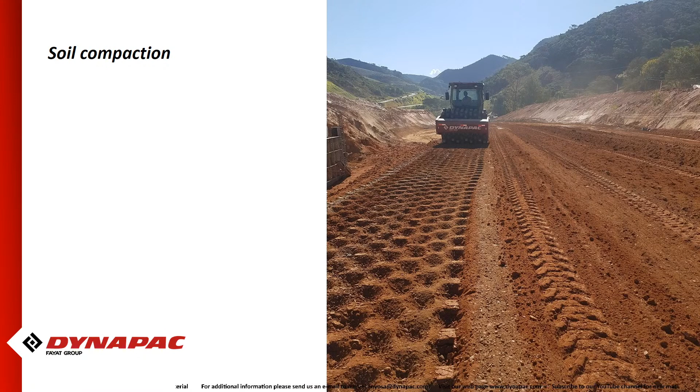But where does compaction begin? We begin with soil compaction. So we're going to start with this one first.

When we're talking about road construction, what does soil compaction mean? Usually we begin with moving the earth, moving the material we are going to compact. Then we level up the material a bit, and then we compact with the machine. So here is where we come in, we are the ones responsible to do this. But what do we use?

Depending on the material we are going to work with, we are going to use a smooth roller, a smooth cylinder roller, or a cylinder with pad shells, or maybe we are going to use a CT3000, which is a tamping roller. So depending on the material we're going to work with, we have to select the correct machine for the project.

So which machine should we start with? First we have to define what is compaction. So what is compaction itself? We have the material, the loosened material, and this is composed or made of soil particles, water, and air.

So what we are going to do is use mechanical forces to pull out the air and increase the density of the material. So here you have the loosened material, we have material in its normal, natural form, and through vibration we are going to accommodate the particles. You can see they moved and they are one above each other, and also through the impact or the force we are going to pull out the air and increase the density of the material.

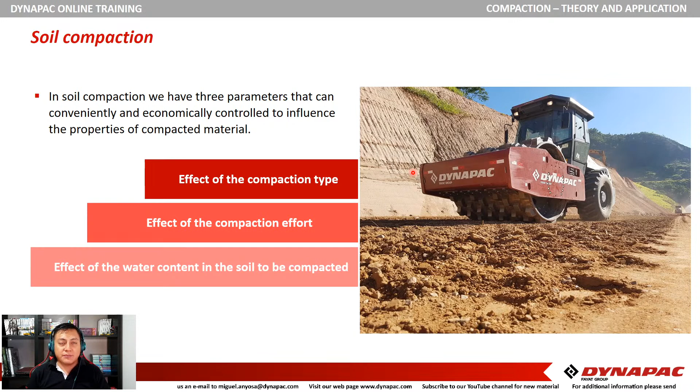So once again, what we were talking about is like we have the material made of soil particles, water, and air, and we are going to increase the density. But what does it mean? You have the dry weight of the material, or the dry unit weight, compared to the maximum water content. So what happens here is you have the dry material, you start adding water, and the more you add water, the more density you can reach. So you continue adding water and you continue increasing the density of the material.

So here you have to take care of this control. How do you do this? You do this through the Proctor method. The Proctor method was created around the 1930s, if not mistaken, in 1933. This engineer, Proctor, developed a method to check how much water you include in the material before reaching the maximum density of the material.

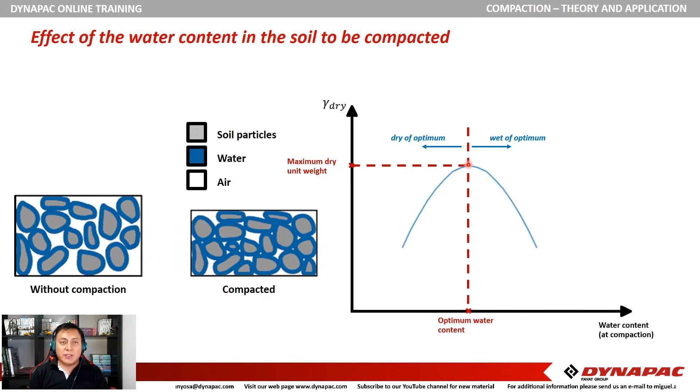So when you reach this point, before reaching this point, you are dry of the optimum moisture level, or wet of the optimum, because if you have too much water, then again you will lose the stability of the material, so you will lose density here. So you have the highest point, you have to calculate it, and this is where you are going to work, and this will be your comparison or your point of measurement when you are talking about compaction.

So what I was talking about here is like when you have the Proctor, you are talking about the energy you are going to use to compact this material. So the standard Proctor developed in earlier years, you have this weight dropped from a height of almost 30 centimeters, and you have material and you will impact this weight on the material.

So this creates some energy, this dynamic energy you are using to compact the material, and this will create a curve that you can see. So you are increasing the quantity of water and you can measure how the density is increasing. Then in the Second World War, we had bigger machines, bigger airplanes, bigger trucks, more load, so he needed to develop a test that could handle this new quantity of load, or the force the material would have to support.

And he created a modified Proctor, and he increased the energy and the quantity of layers. This way you can measure what we are talking about, the modified Proctor, with more energy. Actually, you can see here that from the standard to the modified, you have more energy needed, but with less quantity of water.

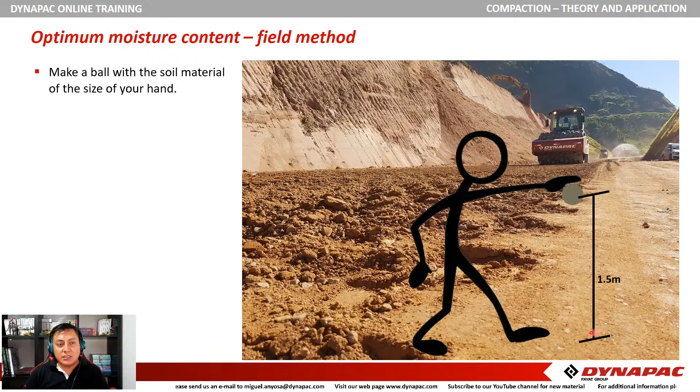What you can do is make a ball of material in your hand, like a snowball, with the material you're going to compact. You drop it from a height of 1.5 meters onto an already compacted place. This part is already compacted, so when you drop it, it will hit the floor, and depending on the behavior of the material, you are going to see if it has good water content or is still a bit dry.

For example, if it breaks into several parts and is spread around like several particles, then you know the water content is less than optimum. If it breaks into 2-3 parts that remain fixed, maintaining some stability, then it's quite close to the optimum moisture content. And if it deforms completely without breaking, like mud that hits and just deforms, then you know it has too much water. So this is a quick way to know in the field if the material is good or not.

Even a few days ago I was talking with a customer who had attended similar trainings here in Latin America, where we did some workshops. He called me because he had issues with compaction, and I requested this kind of video from him, and we could see it was too much water. So this can help you even if you're not there right now, given the global conditions we're aware of - you can see it from a video and be aware of what's going on with the material.

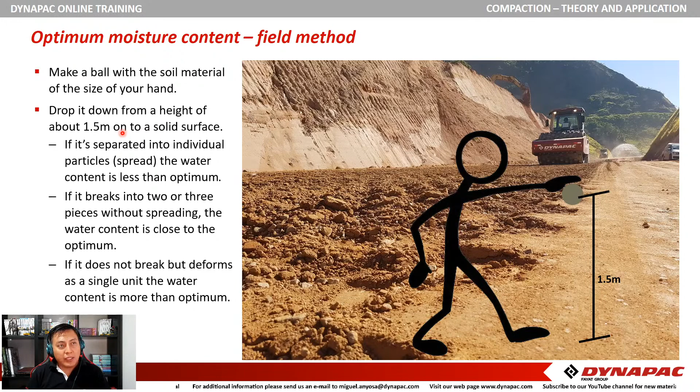So we've already seen that we can measure or handle the quantity of water. Then we talk about the energy we use to compact the material, and now we're going to talk about the machine we choose. We have vibratory compaction and tamping compaction. Depending on the machine or material you work with, you select the machine, so you can choose between vibratory compaction or tamping compaction.

I did not include static compaction here, but I will mention a few comments later about that. So, general rules for application: for coarse soil we use a smooth cylinder, and when we're talking about cohesive soil, we use tamping compaction. We can also have a cylinder with pad shells to do the compaction.

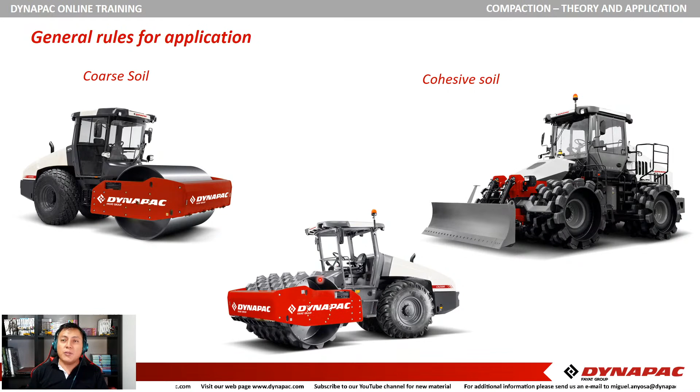But when do we use any of these machines? When we're talking about clay compaction, due to the material, we need a lot of force and a lot of energy, so you use big machines to compact this kind of material. For clay, we can talk about the CA 5500 PD or CA 6500 PD, but actually you can have a better machine like the CT3000 for this kind of material. For this kind I would recommend the CT3000 because of the high impact force.

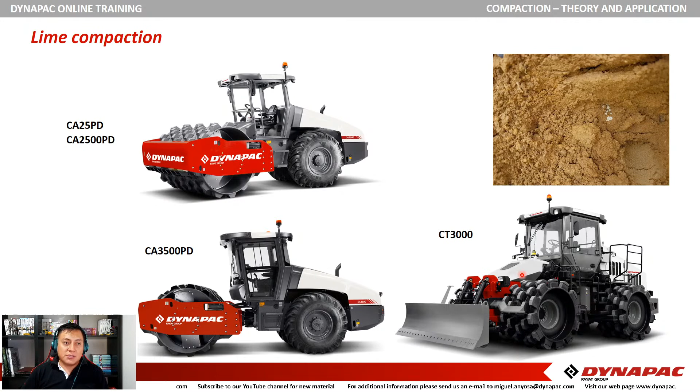Then we have lime compaction, which is a bigger grain, actually bigger size of particle. We can use smaller CA machines, not the big ones. Still, we can use the CT3000. This is actually a good machine also to compact lime.

Then we can have gravel and sand, or multi-graded gravel, and sand compaction. You have particles here, of course, and the bigger the particle you have, the bigger the machine. So for gravel, you can do it with a CA1500, a CA15, or CA25, but even a CA2500.

But the bigger the particles, you should go for a CA2800, CA3500. So you have to understand that it's not only because of the size of the machine or the weight you are going to compact with, because also the thickness of the cylinder is going to be the one that receives all the impact of the material.

So you have to also check this, because the bigger you go, the bigger cylinder you will need. For example, if you're talking about boulder compaction, here you're talking about 15 centimeter particles. Okay, these are rocks, these are not particles anymore. We're talking about rocks here.

So if you want to compact there, you will need a bigger machine and a smooth cylinder also. Please do not, we had this experience with one customer that was using a pad shell in the cylinder to try to break the rocks. Actually it could work, but you're going to have a lot of wear, and the bouncing effect on the machine is going to be such force that you're going to break very easily the shock absorbers, and you're going to damage the cylinder.

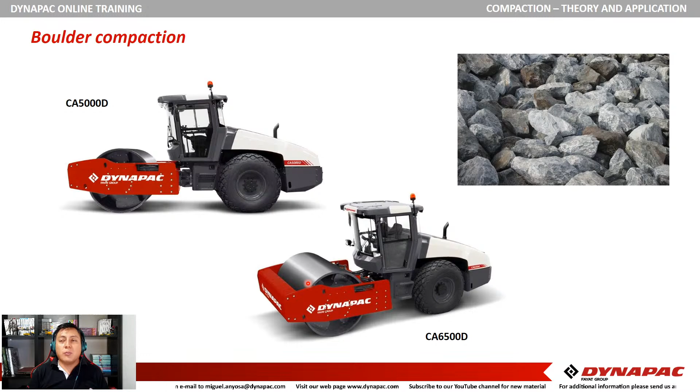You have to be aware what kind of material you are compacting. Otherwise, you are going to damage the machine, and you're going to increase your time of operation and also affect your productivity. So we have to be aware where we are using the machine and why we are using this kind of machine.

What parameters should we consider for vibration compaction? Here we're going to go into more operation tips. So, is a 15-ton machine better than a 12-ton?

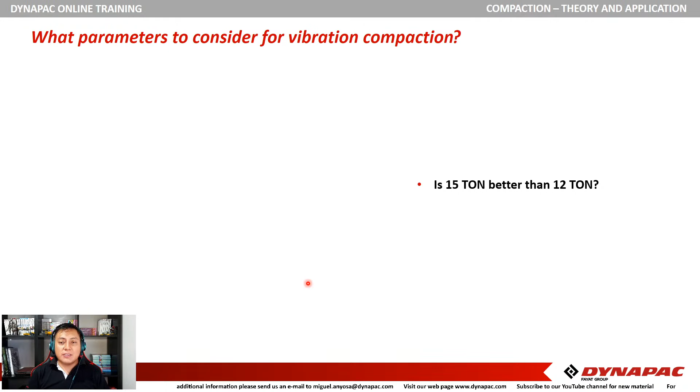One of the questions we usually receive from customers when they want to select the machine is like, I have this option, this one has more weight than yours, and they feel or think that this machine can be better because it has more weight. But you have to understand which part is responsible for the job.

So when you think about a smooth cylinder, or even just an auto-propelled cylinder here with the machine, you have to think that the engine has the pumps, and the pump is sending flow to the vibration motor to move the eccentrics.

So the one that's actually making the compaction job is the front module. The front module is the responsible one. It doesn't matter how much weight you have in the whole machine, what's important is how much weight you have in front here.

So actually here you have to think, if it's 15 ton, we have a 12 ton machine, but in the 15 you have, I don't know, 12 ton here, 3 ton here. And in our 12 ton machine, if I'm not mistaken, we have almost 6 ton here and a bit less than 6 ton here.

So actually this front module is doing the job. So more weight here means more strength here. Also you have to take into consideration the amplitude and the vibration frequency you are going to hit with. So this is what's making the work.

So if you have the values here, then you can compare. It doesn't matter if you have a 15 or 12 ton machine, you cannot compare them by the operational mass. You have to compare them by the front module mass.

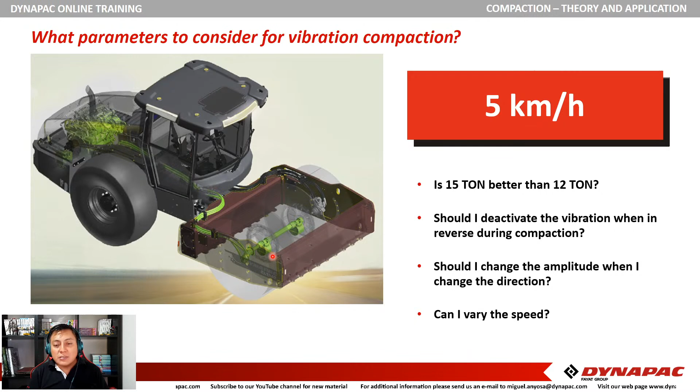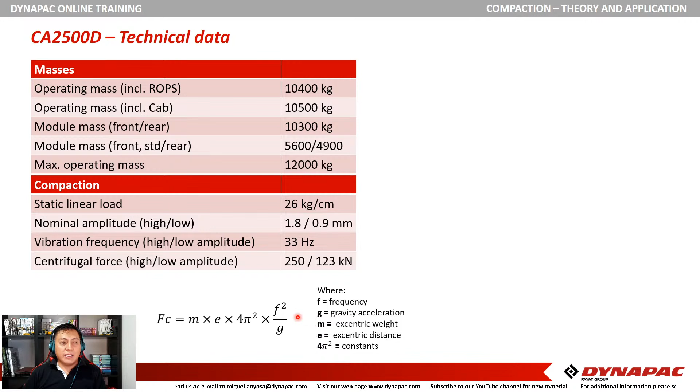Some technical information we can find in the web page. As I was saying before, it's the weight of the machine. You have the operational mass, the operating mass, and also the compaction data. One value here is the centrifugal force, which you can calculate with the formula here. Fortunately, our engineering department already works on this and can provide the value directly, but some people like to compare this value. You can find it in the web page, dynapac.com.

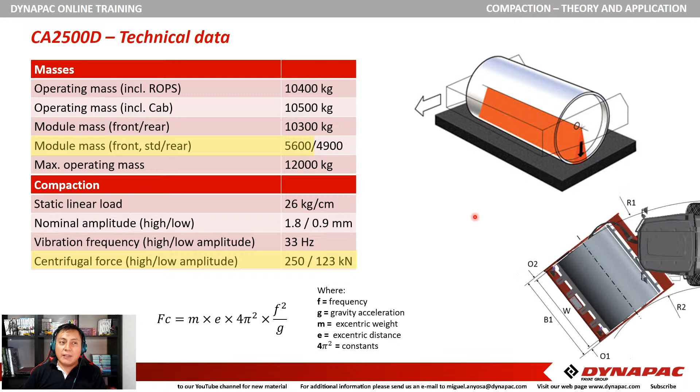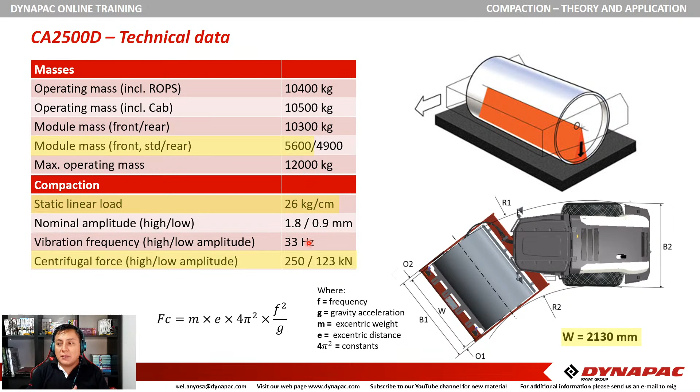And of course, as I mentioned before, the one responsible is the front module. So you need to know how much the front module weighs, and understand that the width of the cylinder has a value. If you divide the weight by the width of the cylinder, you can find the static linear load. This is also important. Of course, you can also find the nominal amplitude in the machine, and the vibration frequency, which is the times per second the cylinder hits the material.

Also you can find this information. If you don't have access to this, you can ask us at Dynapac, or your distributor or dealer, and they can share this information with you. But we have to understand this information a bit. This is some theoretical information we share, for example the maximum recommended layer thickness of the material we can compact. So with a CA 2500D, we can compact these different materials up to this amount of thickness layer.

But this is theoretical. When you start using the machine, it will start wearing. Over time you will lose thickness of the cylinder, and that way the amplitude or the impact force will change. Also, if you are not looking into the maintenance of the machine, you will have some leakage, and you will lose pressure, affecting the compaction. So even though we can say this can be done by our machine, we have to consider that this can be affected by maintenance, wearing of the machine, and of course the experience of the operator.

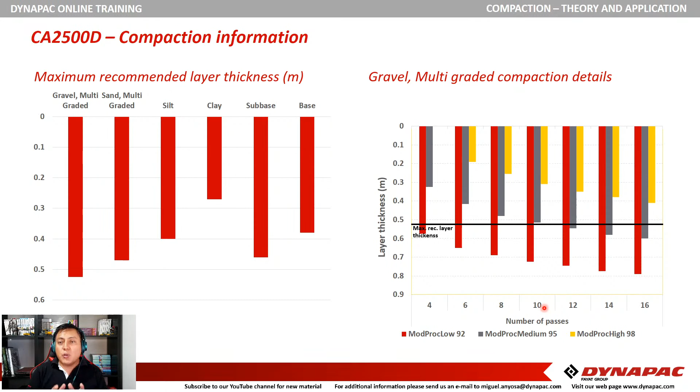But this is a nice start, because now you're aware of the average number of passes you might need. Then again, you will need to do some additional tests, so you are sure of how many passes you need to compact the material.

So what is the best compaction speed? What we have seen in the field, it's around 18 to 20 kilometers per hour. Miguel, but we have competitors that say they can achieve 30 kilometers per hour. Of course, our machine can also go up to higher speed, but we have to understand something: the higher speed you go, the higher energy you create, and the higher force you compact the material with.

So what you can see is the higher force you find will create a more bouncing effect. The bouncing effect will impact the machine and create vibration. So the higher speed you go, the higher vibration you will feel in the machine and in the cabin. So the operator is quite aware of how much energy they can feel.

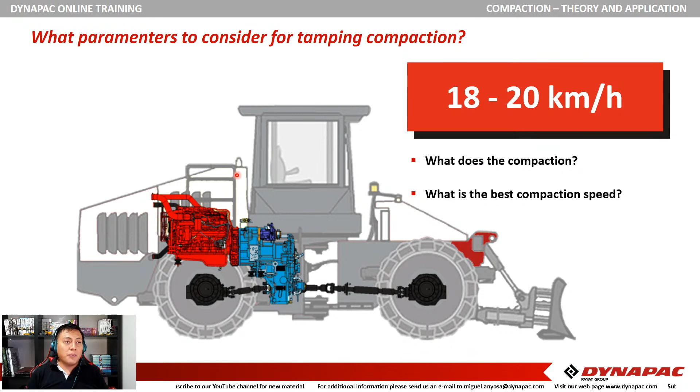So this is a good speed, an average speed you can find with the machine, but you have to be aware of other conditions of operation, the quantity of material you're going to compact, and again the thickness of the layer you're going to compact. According to the machine, if you're talking about silt, you can go up to 42 centimeters, and for clay, up to 30 centimeters.

One detail we missed before when talking about compaction: usually you have one machine that moves the material and another that levels it, so you get a similar thickness layer across the whole surface you're going to compact. But you may find some parts where you're not sure if it's 30 centimeters on average, or 20, or 50 - you can't measure that. Some parts may have 60 centimeters, others 40 or 30 or 25 or 20, depending on the material and what is below.

This part is very interesting, because if you miss it, you can have some places more compacted than others, and this can affect the readings you get from whatever tool you're using to read the compaction.

When we're talking about the CT3000 and, for example, clay - what I discussed with Marcos - the experience we had was 25 centimeters. You might say, Miguel, but to reach high compaction we're talking about 22 passes, that's too much. But remember, you're talking about higher speed here - about 20 kilometers per hour - so you can go faster, and the machine has more width, so you can compact more area. That's why we usually recommend this kind of machine for clay, so you can do it faster, not only in speed but in time.

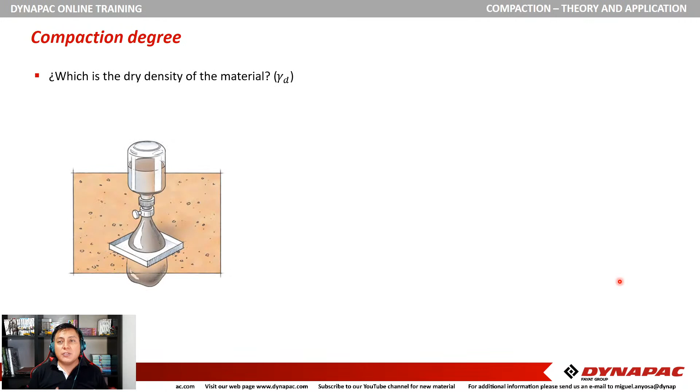In the Proctor test you do the same thing: you add the quantity of water to the material to reach the highest density possible, giving you a mixture of water quantity plus material quantity. You dry the material, so you know how much material you have, then you weigh it and compare this weight. So first you take the sample, take it to the oven as I mentioned, and let it rest.

There are also field tests that use centrifugal force to separate the water quantity, then they calculate: if I weigh the material and know this much is water, the rest is material, and they compare the values. So you take the sample, find the dry weight, compare it to the lab test's maximum dry density from the Proctor test, and divide one by the other. You divide your field dry material value by the lab dry value, and multiplying by 100 gives you the compaction degree or compaction level achieved.

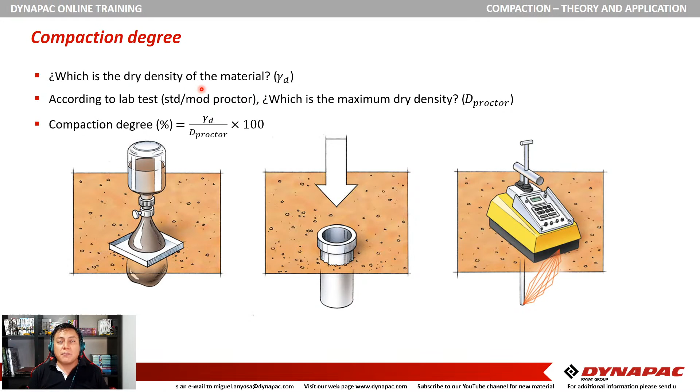Now, this is how it's done in the field, how they compare it. But this is just the most common way I can speak about, because it's what we usually see here in Latin American countries. Of course, you can also use technology, and when you have technology, you should use it.

What is the recommended number of passes?

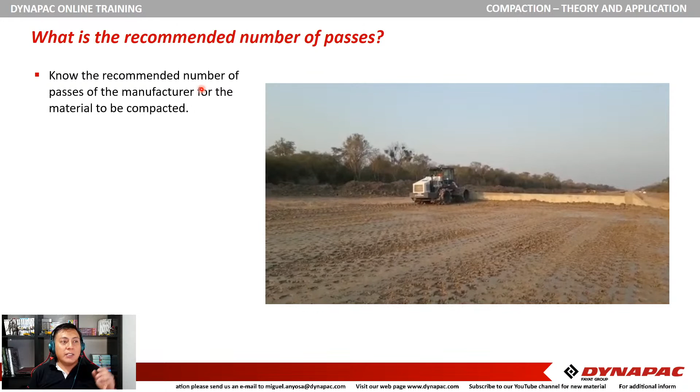When we're talking about recommended number of passes, first you have to know two values: what is the compaction degree the customer is looking for, and what is the recommended number of passes by the manufacturer. We as Dynapac can recommend a number of passes to reach a certain level of compaction, and we also have the compaction degree the customer is looking for. So what we have to understand is how many passes do we need to get to that.

So we have the thickness layer of material. We know about 10 passes to reach that material. So what we actually recommend is, if we need 10, let's start measuring from pass number 8. From the eighth pass we start measuring, then we do the ninth pass, and then we say, yeah, we are very close, or we have reached a compaction degree, or no, we need a bit more. Then we do the 10th pass, and there we are. Or maybe not, we need one more pass.

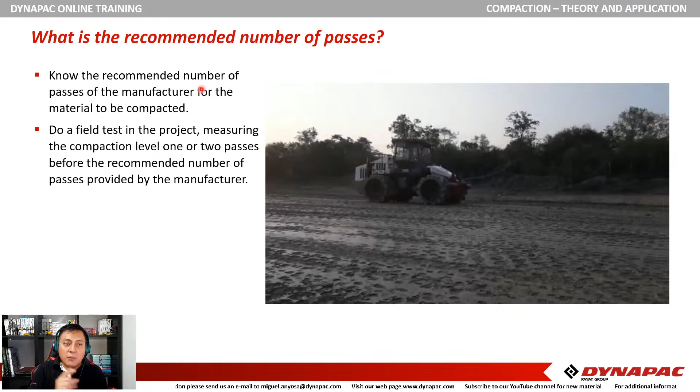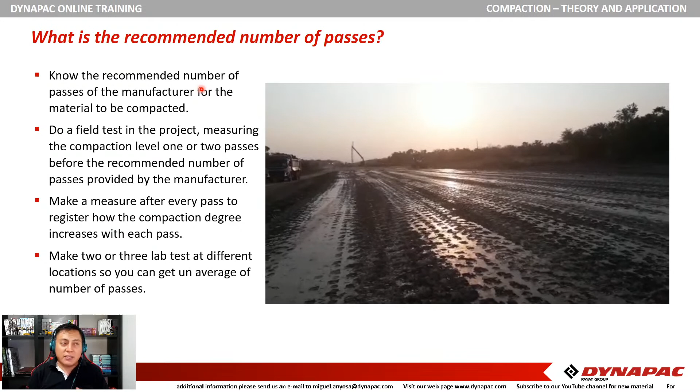So what we actually do is start recording, registering every value we reach with every pass, and then taking this to several locations so that we can get an average of passes needed to reach a certain compaction degree. So this is how we could calculate the number of passes. But as I was mentioning before, if you have the technology, you should use the technology also. This manual method is to understand how the technology measures this.

So do we have another alternative to control the number of passes? Yes, of course, we have the compaction meter. It's very well known here in our region. The compaction meter uses an accelerometer that reads the bouncing effect in the machine. It will show in a display how much is the compaction. So when we reach a certain level, depending on the type of material we're compacting, it will show us, yeah, you have reached compaction, or no, you still need to compact until it shows us how much it compacts.

Another possibility we are talking about right now is the Dyn@lyzer. But the main difference between compaction meter, Dyn@lyzer, and the manual method I was showing before, is the number of passes. When we're talking about number of passes in this slide, we're talking one pass is from point A to point B and from point B to point A. That's one pass.

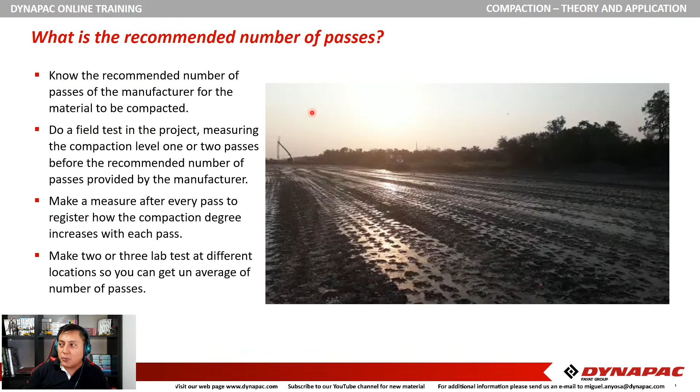When we are using the technology, they are measuring each movement of the machine. So when you move from point A to point B, they are already showing what is the degree of compaction of the material. The same with the Dyn@lyzer, it's already recording, and you will see it in the application, in the display or tablet you have with the software. You will see that it starts recording every single movement and how the compaction degree in each pass is increasing.

So maybe you will need a compaction - well, if you are talking about the most common number of passes, you will need 5 passes and a half. You can understand it in the Dyn@lyzer like 11 passes, because you're moving from A to B1, then B to A2, so you have to do 11 passes, while in the other compaction method you are using 5 passes and a half. That's how technology helps us improve, because with 5 passes and a half I'm already reaching my compaction degree needed. I don't need any more, I don't need to complete the additional B to A movement to complete the compaction degree.

So that's something you have to be aware of. That's something I was talking about with the department in Sweden also, of how many, when we're talking about passes, what are we talking about? This is the old way, and this is how the customer knows it. Because when I go to the field and talk with the customer, when we are talking about one pass, we're talking from A to B and from B to A. So when we are introducing technology, we have to be aware of the knowledge they have, so we don't mix up what we're trying to get to the customer, what we're trying to make the customer understand.

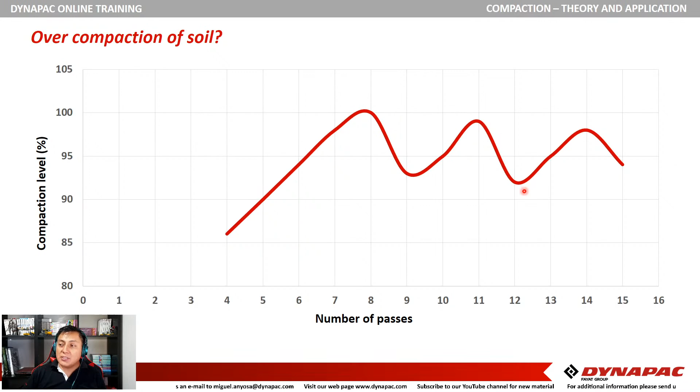This can be also seen in our machines. So what makes the excess of passes, how can it affect our material? It actually can break, you will see the shock absorbers break first. These are like the fuses in the mechanical side of the machine. So if this one breaks very fast, it could actually mean that you are wrong in the application.

Of course, it could also happen that we have a material issue here. Could happen. But most of the time, we're talking about the energy that these ones are receiving back. So they are the ones receiving all this excess of energy. Besides the bolts, besides the machine, the vibration increasing in the machine, these ones are responsible for receiving all this excess of energy.

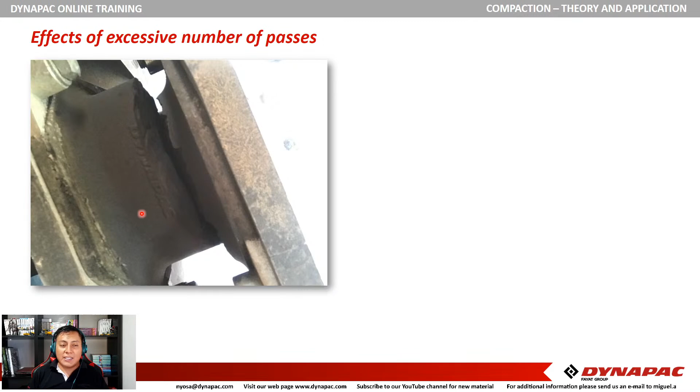You have to be aware of the application the machine is working with. You have to go see it for yourself or request this information from the customer so you can understand what's going on in the field. Many times, when you are the owner of the machine, you don't have this information, so you can ask your operators or the one responsible on the field to send you information on what's going on and which machine is being used for the compaction. Then you can compare, be aware of what's happening in the field, and understand how your machine is being affected and how the wearing is coming along.

As I said before, the cylinder is a wear part. It lasts quite a long time, but it's a wear part, and it can actually break very fast if you are not taking care of it at all. When the cylinder reaches 30% wear, you have to check for possible fissures or cracking in the cylinder, see if there's damage, and please do not weld them. I'm strongly against that, because what I've seen in the field is they notice some fissures and start welding, using anti-wear welding thinking it will last longer. But when you weld, you're crystallizing the material, and then it will break faster. Actually, it won't break at the weld itself, the wear there will remain, but the fissure can increase faster. So you might think it's a cylinder quality issue, but no, it's because you are welding on it.

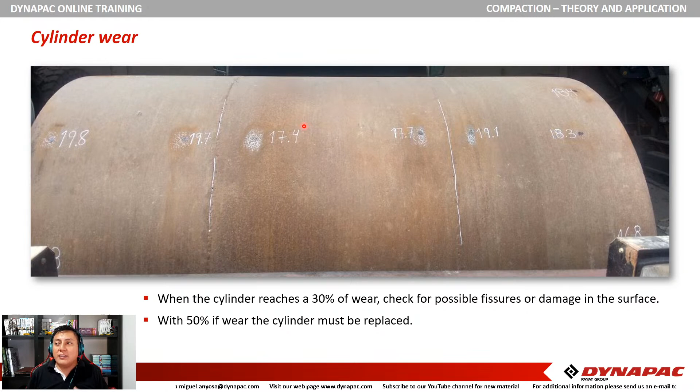What they actually recommend is, if you're going to try recovering the weight, you should use the lowest thickness of material as reference, and reduce everything to that same thickness, for example 17.4 millimeters, the smallest one we have, and then recover the weight of the cylinder. But here's the issue: if you don't do it correctly, if you miss even 1 millimeter in the positioning of the plates, or use more welding material on one side than the other, more grams on one side than the other, the movement of the cylinder will become uneven.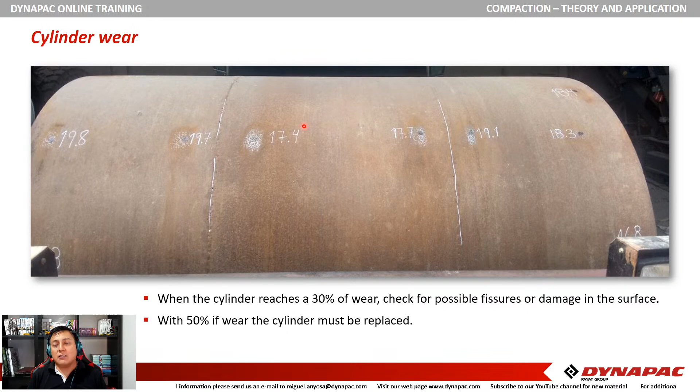It won't get stable, and in time you will have extreme movement in the cylinder, and it will start breaking the shock absorbers. From my experience when I've seen it with customers, even when promoting not to do this, the most they would work with was 1 month, and then they will call me again to fix it or change the cylinder. Most of the time it's just change the cylinder.

Okay, so that was soil compaction. Now we move into asphalt compaction. I think it took a bit long, so I will try to go faster here. In asphalt compaction, we have the machine that is going to move the material, mix the material, then level the material, then compact the material. We have to select the machine according to our needs, and then we are going to spread this sort of glue on top of the material before using the paver.

And here I will leave you with a video, so I can take some water, of how they should not do it, but they actually sometimes do it. He is very, very skilled, by the way.

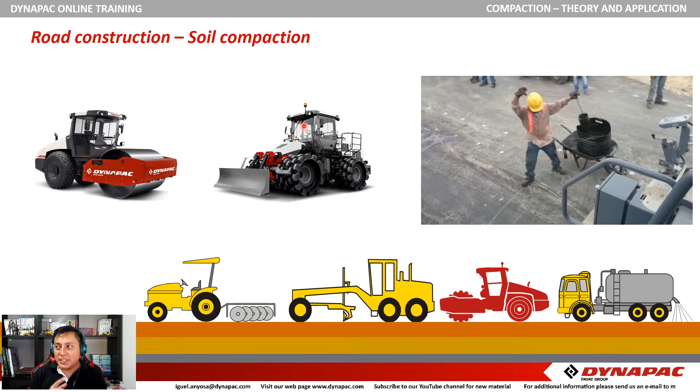Yeah, so this is something you can actually see in some countries, not only in Latin American countries. But this is not the way you should do it. And besides that, you can see well, he might be skilled, but that hand on the left, by the way, was someone from Germany.

This was my first paver commissioning. He joined me there to do some additional training to the customer, so we were amazed by the skills of this guy. Of course, you can have the correct machine here to spread it.

One point I wanted to mention here is that most of the time when you are working with this kind of machine, you usually leave the glue to stay there for, I don't know, some hours or maybe a day. But due to rain conditions or weather conditions, sometimes they just let it sit 1 hour to dry a bit and then they will start paving. Okay, so this can happen also.

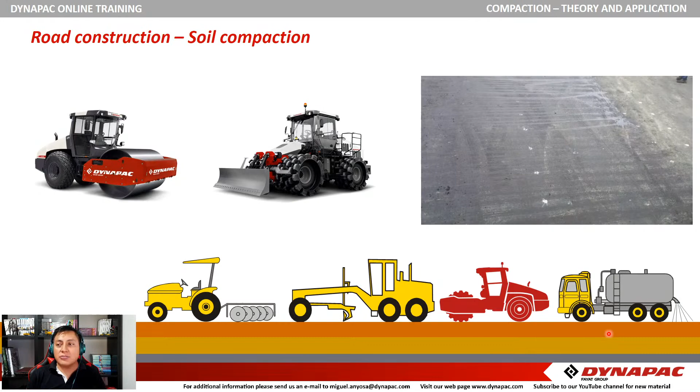You should actually use this kind of machine to improve this paving process. And then you can also use a crawler paver or a wheel paver, depending on the application or the job you are going to do. I would say the main difference here, just to mention, is the traction. You will have better traction when we are talking about crawler pavers.

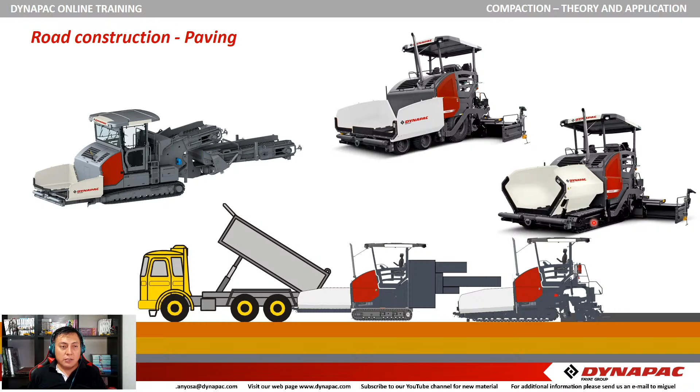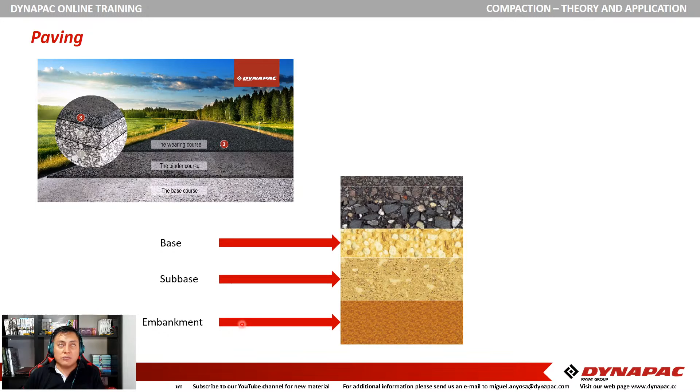So I'm going to talk a bit about asphalt. When we're talking about paving, what we have is we do with the soil, or with the smooth cylinder roller, the embankment, the sub base, and the base, and then we're talking about asphalt. In the asphalt, we usually recommend 3 layers: the base layer, the binder layer, and then the surface or wearing layer, or the top layer. This is the one where you are actually going to do the maintenance. So when you are milling the material, you should be milling only this one, but it can happen that you will have to mill everything, of course.

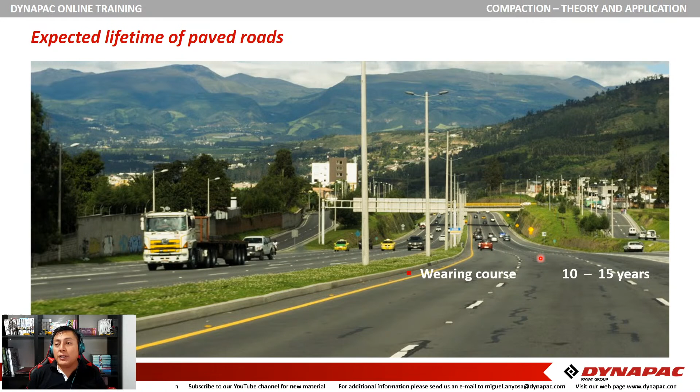And what's the expected lifetime of paved roads? When we're talking about the expected lifetime, for example, you have a highway. What's the theoretical information you have? The wearing course, the top layer, is between 10 to 15 years. The binder course is 15 to 25 years. The base course is 40 to 50, and the foundation could be 50 to 99 years.

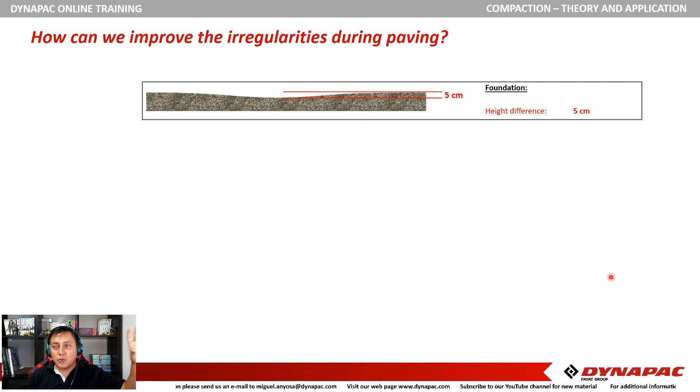Okay, so we have the foundation, and the foundation is well known because you do this with the smooth cylinder roller. You compact the material, and then you can improve with the paver the difference in height or the surface finish you are going to do.

So if you do a pass, the first pass or base layer could already, if you are using a good reference of leveling for the automatic leveling, improve this from 5 centimeters difference to 1 centimeter. Then if you do the second layer, working with a 4 centimeter layer, you could improve up to a difference of 2 millimeters. And then when you do the top layer, you can reduce it up to 0.4 millimeters.

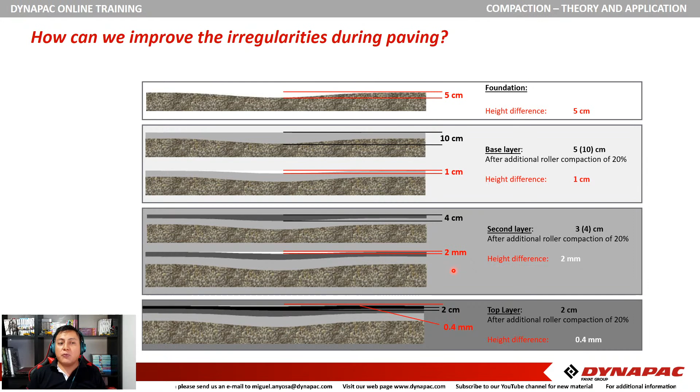So this can be controlled, or actually improved, if you are using control of the height. This will minimize the difference by layer. So every layer you do, you improve the material.

Something we have seen in the field is that customers actually want 2 layers done, or as I've seen in some Latin American countries, they have to do some 10 centimeters of asphalt, so they just do 10 centimeters and that's all. That's all they will do from beginning to end, and sometimes they don't even want to use the automatic leveling system, because the audit people in charge of checking the compaction degree you're achieving are looking all the time for 10 centimeters.

So we actually recommend that this kind of information should not only be for our dealers or our customers, we should reach all the people involved in the paving process. They may understand that sometimes you will find a bit more or a bit less material, because if you are not using the automatic leveling system, you are just copying what's below. So if the foundation has a lot of waves, you are just creating more waving, and then you will have complaints because the surface has too many bumps. This can happen because you are not using the auto leveling system.

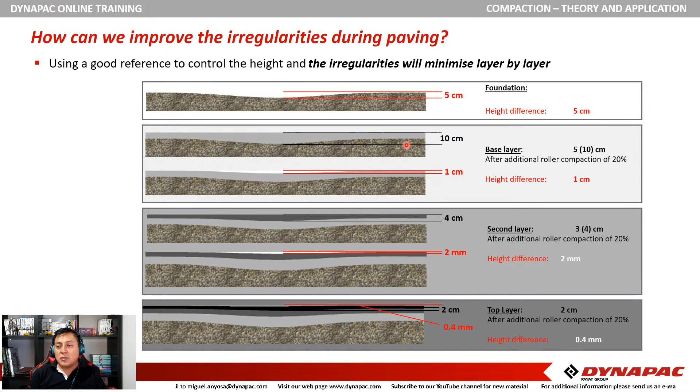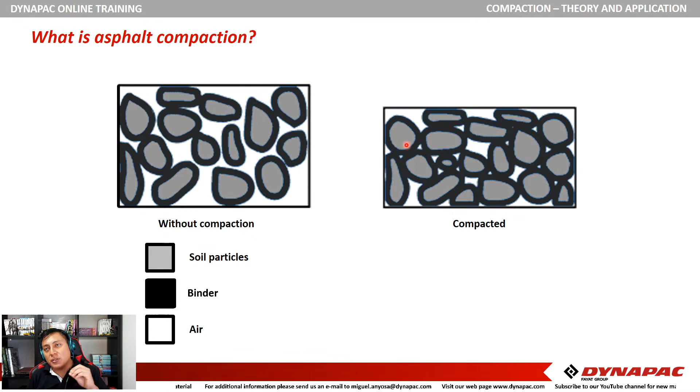We remember that when we were talking about compaction, we had water, air, and soil particles. But here, when talking about asphalt compaction, we are changing the water for a binder. This acts like lubrication and glue of the materials. So when you are compacting, you are accommodating the particles, and the binder is filling the gaps as well as the air. So the quantity of binder is the important factor in this kind of compaction.

So what properties should the asphalt have? We are talking about stability. We need the material to be stable, the higher the load, the higher the force it must withstand. So we need a stable material. It also needs to be flexible, because as I mentioned, under higher load it will deform. But if it deforms, it should have permanent deformation resistance, meaning it should somehow recover from that deformation.

Durability, as I was showing before, the expected lifetime should be around 10 years or more. It also needs enough gaps to avoid bleeding. If you use too much filler material when making the asphalt, or too much binder, you won't have enough space, so when you start compacting the material, the binder will move to the top.

Well, here below you can see some marks of water actually. But you could even find, if you are not using a correct quantity of binder or material, the binder could move to the top of the material on the surface, and you could see black marks here because of the binder, and it will become slippery.

And if you are talking about slippery, you should avoid low slip resistance because you are looking for traction, not a slippery surface. You need friction, so you can gain speed, and so the wheels or tires can somehow stick to the asphalt, letting you turn at high speed when driving fast.

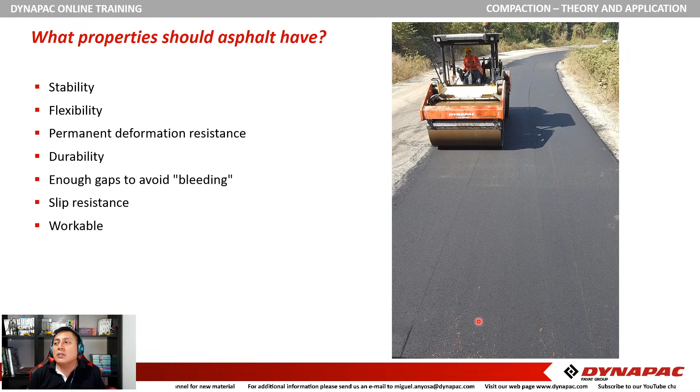Workable, because depending on the surface you are working—if you are in a parking lot, a race track, or a high road in the mountains—you can have different sorts of conditions. So it should be workable. You should be able to move the material or work with it.

How is the composition of the asphalt defined? Well, asphalt is an aggregate mix, so you will have different sizes of particles.

The biggest particle size concept we usually use is: if you are going to use 5 centimeters thickness of material, we should be able to have 3 stones above each other. So if we have 1, 2, and 3, these 3 should fit within the thickness.

So if we're talking about 5 centimeters, we can have 16 millimeter particles. Of course, with a bigger thickness or thicker layer of material, you can have bigger particles. With a smaller thickness of layer, you can have smaller particles.

Then you have the aggregates, and you can have the fillers, the finer grain material. These have to be controlled depending on the material you're going to use.

And of course, then you are going to use the binder, and you are going to define this quantity of binder. How do you define it? You do it through the Marshall method. As we had the Proctor method, we are having the Marshall method.

That is the same: we are going to create some energy using a weight and let it fall from a certain height. And we are going to heat the material.

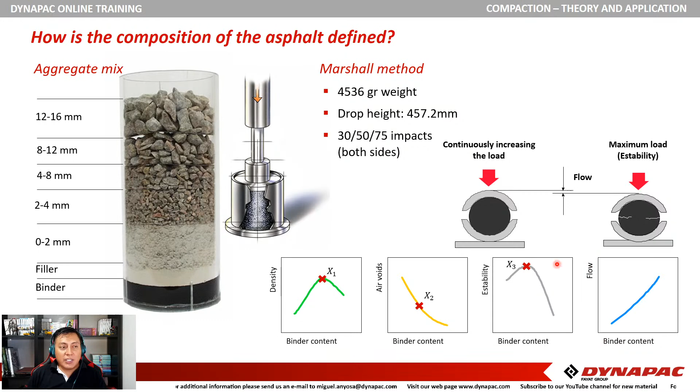But these three—the stability, the maximum load, and the density—and then we have the binder content. These can be measured and divided by 3, and then we have the optimum binder content, which is almost always around 6%.

So actually, when you want to calculate this, you use 6% as a reference. This isn't exact, but we are going to use it as a reference later on when we talk about compaction degree.

But one point to mention here: how do you weigh this one? What are you going to do? This is going to be weighed, and you are going to weigh it suspended in water. You are going to weigh it wet, and you are going to weigh it dry.

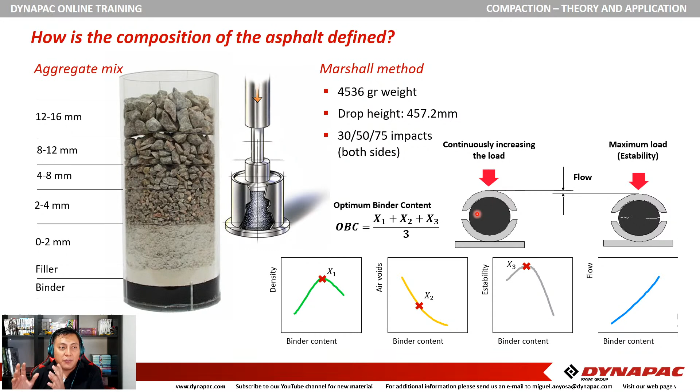So then, with these values, you are going to get the specific gravity weight of the material, and then you will compare it to the material you have compacted, the asphalt you have compacted.

So in the asphalt paving process, we have to understand that the first thing is the material that you have in the asphalt mix at the asphalt plant. Here you can find material composition, material temperature, and material segregation. This can happen.

This can happen from the beginning, from the plant. From here you can have around 160 degrees Celsius of material. Then you are moving into the transportation.

You can also have segregation of material here, the smaller particles moving to the lower part of the truck. And then you have material temperature. It should be around 160, and it should arrive around 140 to the paver. This will also depend on the distance of the construction place and time, meaning how far it is from the plant to the paver or the paving location.

Then you have the asphalt paving. You can have the paving thickness here, the paving width, the quantity of material. You can also have material segregation here depending on the wear parts condition. Tomorrow we're having another workshop where we are going to check on these wearing parts.

Material temperature. Once again, you should be paving around 140. I would recommend no lower than 120, because behind this one you're having the rollers. And then you have the tamper, the vibration you are using in the screed.

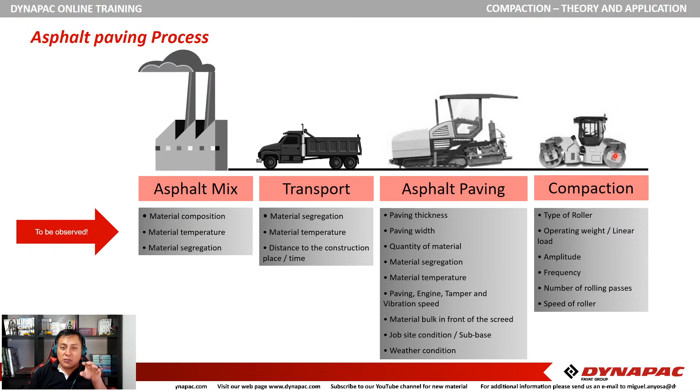But if it's too cold, you will find it while compacting. The vibration and the impact will start breaking the particles, and you will find some white marks in the asphalt. So who is the first responsible of the asphalt compaction?

Well, actually it's the paver. When we are talking about the soil, the road construction, you have the soil compaction, you are talking about the rollers, and then you move into the asphalt compaction. When you're talking about paving, you start with the paver. Behind the paver you will find the rollers, but the first one is the paver.

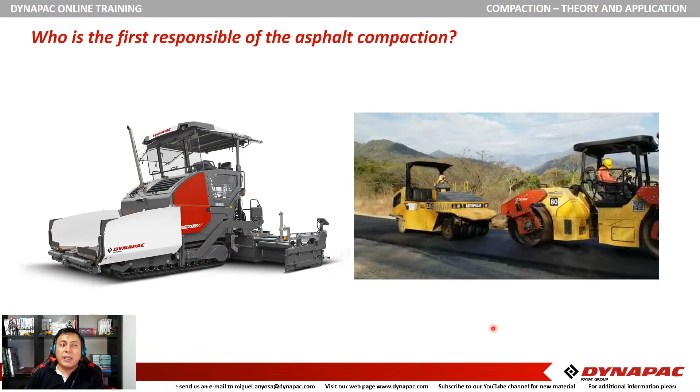And in the paver, which one is responsible for compaction? Well, it's the screed. Depending on the head of material and the thickness layer, you will make this one work, and you will have the tamper, and the vibration of the screed, and you will gain a pre-compaction degree of material.

So depending on the pre-compaction degree of material, you will have the number of passes you are going to use with the roller. So depending on the screed you have, you will have different pre-compaction degrees. Even if you have 65 to 70, 88 for example, this is the most well-known, the tamper vibration screeds.

Now we are with the tamper or the high compaction with a screed. You can actually reach up to 96% of pre-compaction, but these are theoretical values. It highly depends on the wearing of the parts or the maintenance of the screed, or even if you use tamper or vibration.

If you're not using it, because I've been in the field, and when I'm looking, they say no, I'm not using tamper. Why? I don't need it. I don't understand why, because I asked the operator and they don't use it. They sometimes forget to use the vibration. And of course, this will affect the compaction or the number of passes you will need with the rollers, and even the compaction you will do in the asphalt.

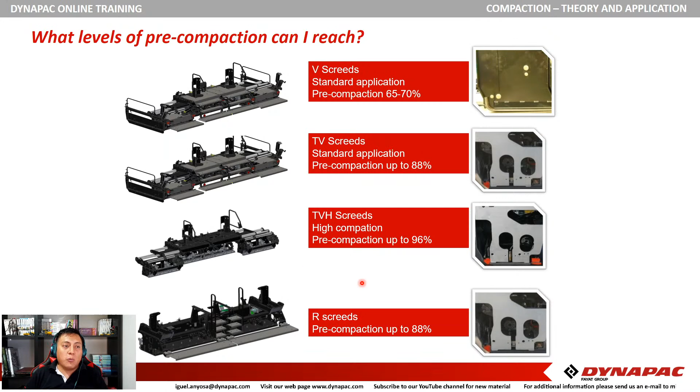So once again, if you have wear parts worn, you will find something like this. This is a good example.

Tomorrow you will have more information in the workshop that Gert is going to work on. Gert is going to talk about these wear parts.

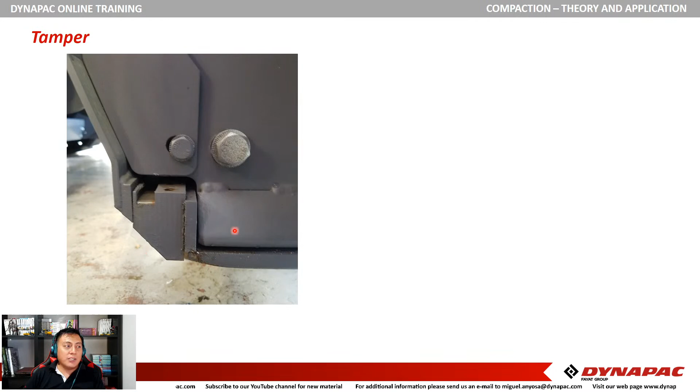But here the one responsible, as I was saying in the screed, is the tamper. So when the tamper is worn, you have no compaction here. For example, you can see here from below that you have all this contact area that is responsible for the compaction, and here you can see that you have no contact area, so this one is doing no compaction at all.

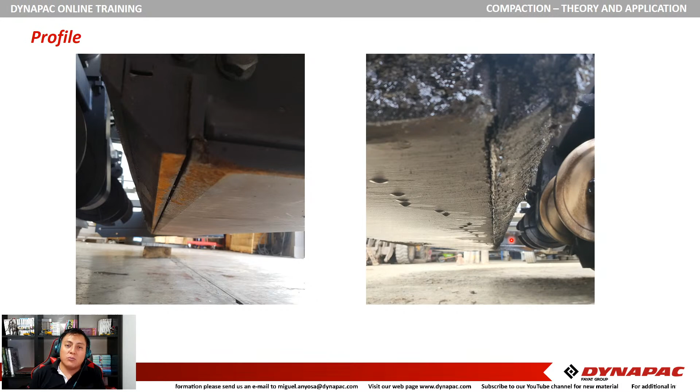And actually, when you are talking about the screed, you can also talk about the screed plate. The screed plate wearing is also affecting the compaction. So you have to be aware of the wearing level in the machine.

When we're usually talking about compaction, we tend to forget about the paver. But this one is the first responsible when we are talking about asphalt compaction. So you have to start thinking about the paver first, and then you can start thinking about the rollers.

Here is the first comment I would like to add. Usually you can see in the field that sometimes they start with a double drum or they start with the pneumatic rollers. But which one is the first? The recommended way to do this is first the double drum roller. But why? Because it has vibration.

What happens here? If you have two particles, for example, I will use these two pieces. You have one above the other, and they are like this. If you use only the weight of the material, they are going to press against each other. They are not going to reduce that much, they are not going to accommodate. If you use vibration, this particle may fall and accommodate atop this one, and then you will increase the density.

So when we are talking about vibration, it will reaccommodate the particles, and then using the frequency and the amplitude, you will have better vibration or better compaction, and then you can completely seal the surface of the asphalt with the pneumatic rollers.

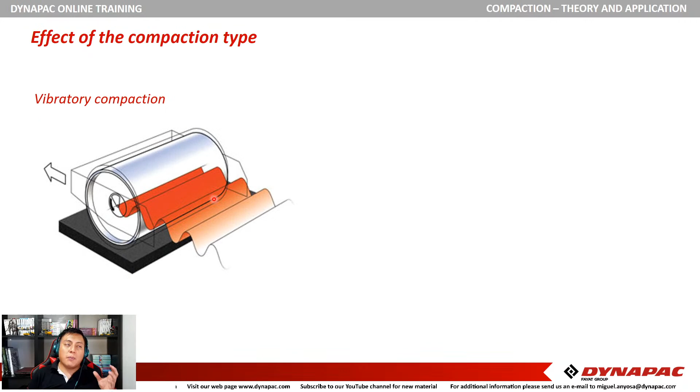So here we're going to talk about the effect of the compaction type. We're talking about vibratory compaction and static compaction. When we're talking about vibration compaction, we're talking about who is responsible.

In this one, we have vibration here, so we have similar questions. Should I deactivate the vibration? No, you don't need to deactivate the vibration. You go forward and backwards and it will vibrate. But what is AVC? Because this machine usually has AVC, that's automatic vibration control. So when you reach more than 1.5 kilometers per hour, the machine will start vibrating, and when you go lower than 1.5 kilometers per hour, it will stop vibrating.

Should I change the amplitude when I change the compaction direction? Depending on the machine, you will or will not have different amplitudes. The small machine, some of them only have one amplitude and on. But do you have to change the amplitude? No, you don't have to change the amplitude again. They won't change the amplitude, they will remain in high amplitude all the time.

Can I vary the speed? It's similar to what I was explaining with the machine before. If you go to 5 kilometers per hour and you go backwards at 5 kilometers per hour, you don't need to change the speed. Actually, as I was saying, if you go slower, you will have more impacts in one location. You are talking about here with this kind of machine above 60 hertz, so you will have more hits per second in the same spot. So actually it does not help to go that slow.

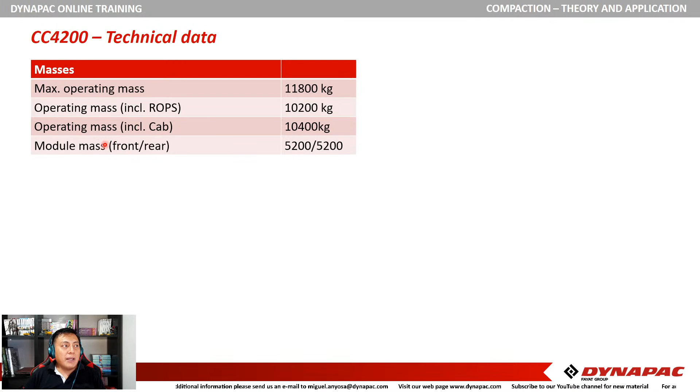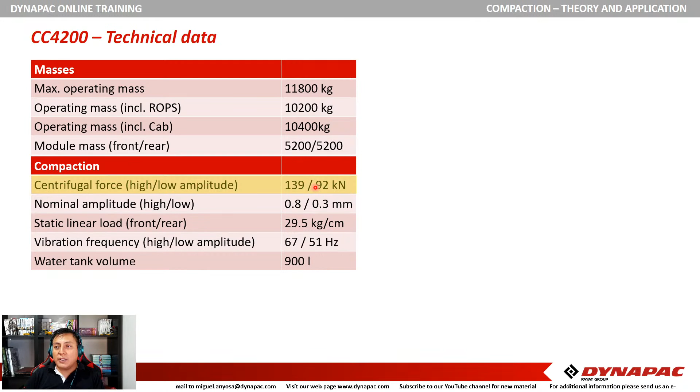Some technical data you will find on our webpage is the total operating mass, and you can find here also the module mass. Front and rear are the same. Then you can have some compaction values. Centrifugal force is already calculated by our engineering team, so no need to go deep into the formula. Then you need to know the weight of the front and rear module, it's here only in the front module, but you understand. You have the width of the cylinder, and you divide the weight of the module by the cylinder, and you have the static linear load.

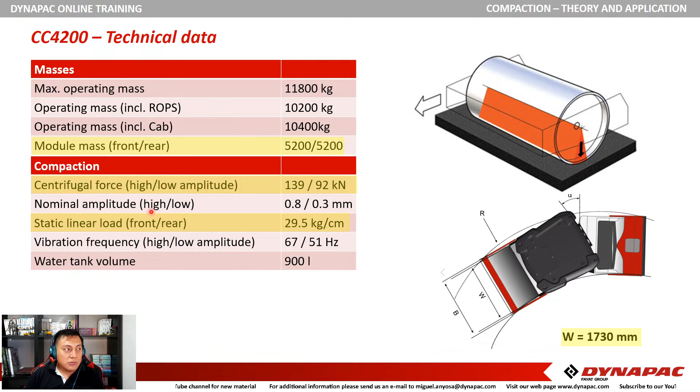They will also show the nominal amplitude, high and low, and the vibration frequency.

Then you can find also information about compaction, what's the asphalt compaction and asphalt compaction details, but this is different here, you don't see the number of passes. Why? Because it highly depends on the pre-compaction degree you can reach with the paver. So if you reach 88% compaction degree with a normal tamper vibration paver, and you need to reach 100% compaction degree with asphalt because this is a high road, then maybe you need 2-3 passes more depending on the size of the material. But if the wearing parts of the paver are not using correct tamper or vibration revolutions, the motors that activate both of them, then you won't reach this 88% pre-compaction degree. So these values will change the number of passes you are going to do with the machine.

So what they can tell you is if you are going to do 2 additional passes, what you can do per hour is like 3,500 square meters per hour. And if you are going to do 10 passes, because the thickness of the layer is higher, or because you are not doing pre-compaction at all, like in some American pavers that only have vibration, sometimes they don't even have vibration, they only spread the material, they don't pave, then you will need more passes. So that way you will need more passes and you will not do as many square meters per hour.

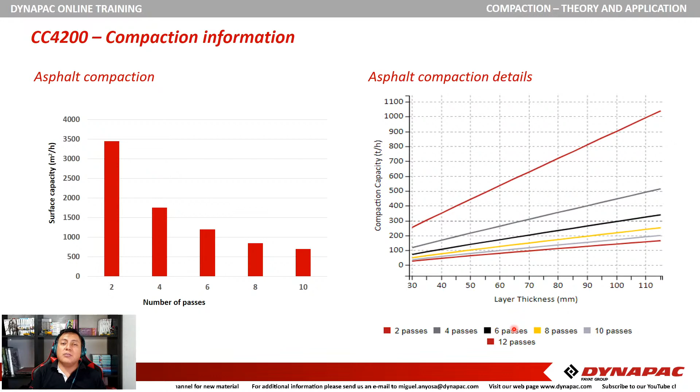Now, what we're talking about here, and I don't understand why it always appears first, but anyway, when we're talking about static or kneading compaction, we're talking about who is responsible for the compaction here: it's the weight of the machine. For example, you have here a CP 1200, and the weight of the machine.

You are having some metal pieces here that you add to gain more weight. This is going to be the total weight of the machine divided by the number of wheels you have here. So the number of wheels you have will affect how much weight. You will divide the weight by each wheel, and you will have the compaction force per wheel. So the one responsible here is the weight of the machine.

So what is the best compaction speed? Actually, the machine can reach around 8 kilometers per hour. I think it can be a bit higher, but it depends on the surface. If you are on a slope or anything, this is around the speed. But once again, you should go forward maximum, backwards maximum. When you are in work mode, you won't go up to the highest velocity possible, you will go up to the highest velocity the machine should compact at.

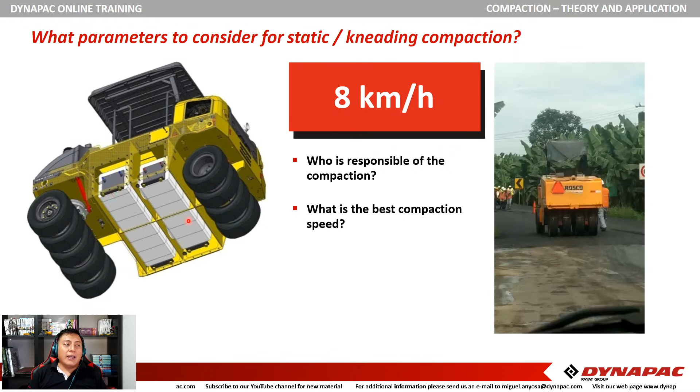One question I want to share here is, what is the best way to clean the tires? Actually, what you have here, as you can see in the video, is that there's no operator. The machine is moving by itself.

Why? Because in some countries they use diesel to clean the tires. So when they clean the tires, they have to spread diesel on the tires so the asphalt won't get glued or fixed to them. You can see the operator now, and what he's doing is just using diesel to clean the tire. Now it's going up the machine and he's moving in reverse.

We have alternatives like Dynaguard, or even in the market you can find a glycerin-based material that helps avoid material sticking to the tire, so you don't need to do something like this. Here he's going very slow with the machine, but as I was saying, you don't need to go that slow.

Second, and most important, I think, this is a safety issue. He shouldn't be doing that. He's crazy, but of course this can happen in the field. This was shared by one of our dealers, and of course this is not a brand issue, this is an operator issue.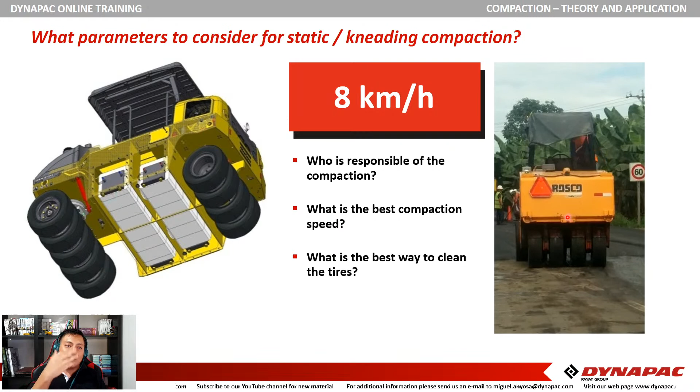As I was saying before, you can find many operators who say they have 10 or 15 years of experience, but that doesn't mean they have 10 or 15 years of good experience. They can improve, and we are in charge of making them improve. These kinds of workshops are also available for our customers, so we can share this information and help them improve their operations and safety issues.

Talking about this, for example, can we use this machine in gravel or in compaction of multi-graded material? Yes, we can. But once again, it won't affect the material the same way. It won't vibrate the same, won't reach the same compaction, and won't achieve the same thickness of layer that you can compact. There's information shown on the web page you can check if you need it. But actually, the most common use of this machine is for asphalt.

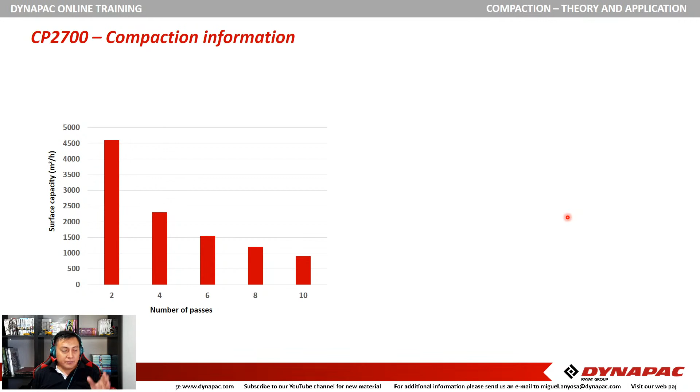Here you have some compaction information, and as I was saying, if you have the paver compacting first, it will affect how many passes you need with the double drum roller, and of course how many passes you'll do with the pneumatic roller.

What about a combi roller? Because we also have these small machines. Which one is responsible for compaction? Well, you have both, vibration and static or kneading compaction. This one goes first and this one goes later, but the mixture of them gets the job done.

Should I deactivate the vibration when moving in reverse or during compaction? No, you don't need to deactivate the vibration when moving in reverse during compaction. We already explained that. Why?

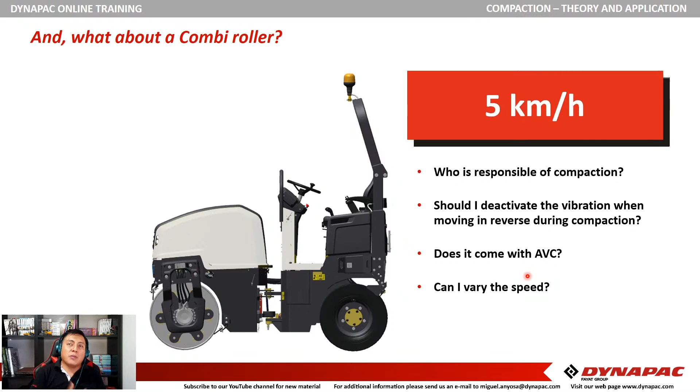Does it come with AVC? Yes. Can I vary the speed? Once again, the speed should be constant, we shouldn't vary the speed that much. It's going to affect how much impact we're doing into the material, and maybe we are going to over-compact the material.

In compaction degree, what we're talking about is the specific gravity of the compacted asphalt. Here we will take a sample using a core drill, take it to the lab, and they will weigh it dry, weigh it wet, and weigh it suspended in water. Then they get the specific gravity weight of this material and compare it with the weight received from the Marshall method, and dividing both values gives us the compaction degree.

A similar way applies with the Proctor method, correct, when we're talking about soil compaction. This is the way we're going to do it. Also, you can have a device that reads directly from the asphalt.

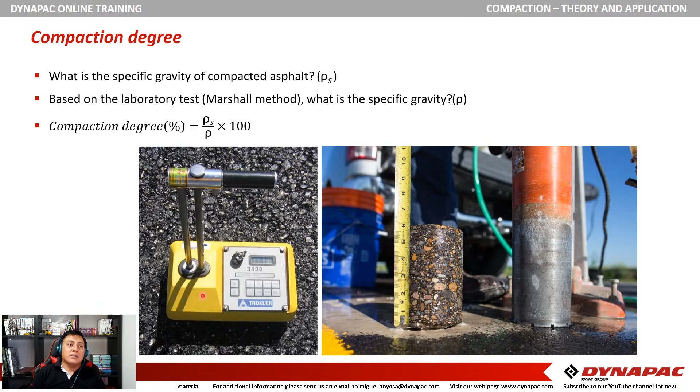What is recommended for number of passes? I've mentioned this several times, but what is the compaction degree needed for the project? It depends - is it a road, an urban road, a highway, an airport? You will have different numbers of passes.

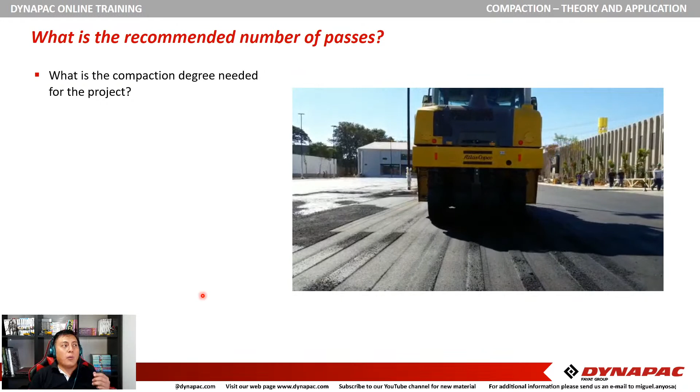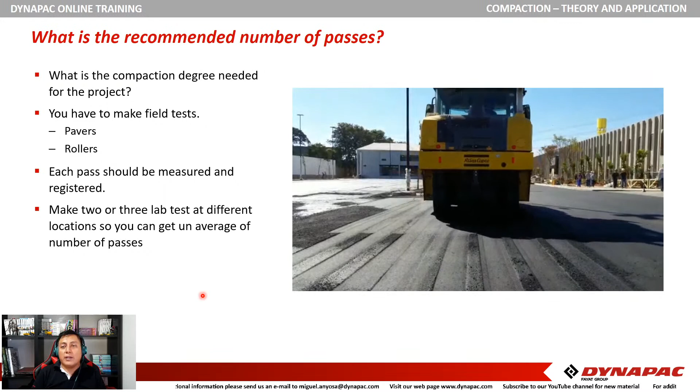So what is a number of passes? You have to make field tests and measure the pavement - how much compaction degree you reach with the paver, and then how much compaction degree you reach with each of the passes. Then you will find how much you need. Each should be measured and registered. If you make 2-3 lab tests, you'll know the average number of passes you need.

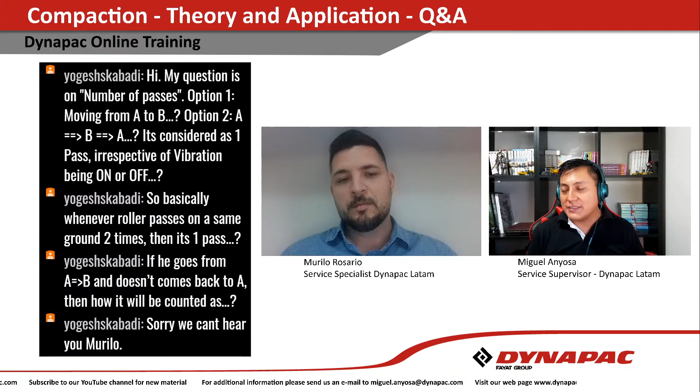Okay, something like when we're talking about this concept - this is the old age concept, I don't know if old age because we're still using it - but when you go from A to B to A, that's one pass, so from A to B alone will be half a pass. But take into consideration what I mentioned before about the compaction meter and the analyzer.

When we're talking about the analyzer, every movement you make with a roller, you are compacting - it's measuring every movement. So it doesn't matter whether you call it half a pass or one pass. If you move from point A to point B, you have one compaction degree; from point B to A, you have another compaction degree. So when you're using technology, it somehow differs from the most common way of measuring in the field.

If you don't have a compaction meter or analyzer, you have to understand that one pass is from A to B to B to A - that's one pass. If you're talking about a compaction meter or analyzer, you'll read it on the display or tablet, recording every single movement you make. So that's quite a different concept - you have to be aware of that. Murilo, could you explain again the most important part about the concept of speed?

Murilo, you there? Yeah, sorry, I was checking our question here. Oh, about the speed, machine speed.

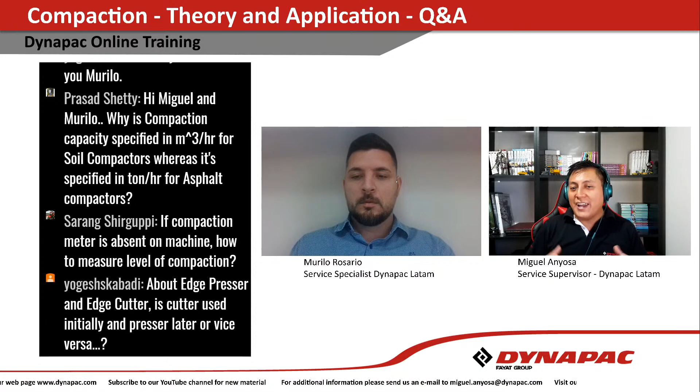So one question I wanted to take from the previous presentation was about the pneumatic rollers - why don't they have vibration? One point I missed to mention is, besides static compaction, even if we add vibration, pneumatics are made of rubber, so that rubber will somehow absorb the vibration force you create. So you won't actually get any vibration energy from the machine, and it won't compact at all. That's why you don't use vibration with rubber - you don't mix them.

Okay, about the edge presser and the edge cutter - is the cutter used initially and presser later, or vice versa? Actually, you will cut easier when not pressed before. Also, some of our dealers or customers use the presser first, because they say when they use the cutter first, it can leave a rough surface and the material will spread. When they use the presser first, they could take some tacks of material, not loosened material. So that could happen. But what we usually find in the field is that they usually use the cutter first, because it's easier for the cutter to cut the material.

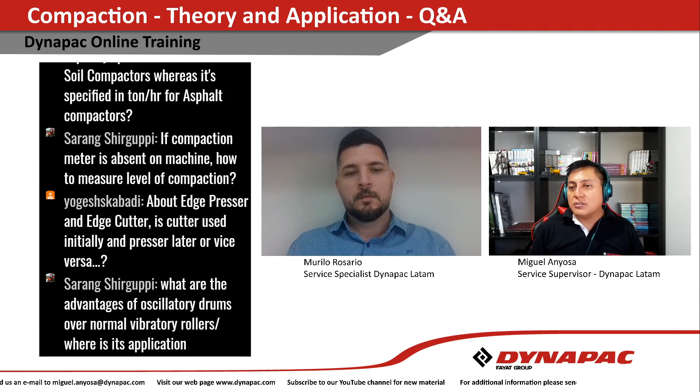Okay, advantages of oscillatory drums over normally vibratory rollers. Well, this one is for more concrete applications. When we are talking concrete, due to the material, you should use an oscillatory drum. You can actually also use vibratory rollers, but with lower frequency, lower amplitude - maybe not even using vibration at all, just passing. For example, on a bridge of concrete, then doing a layer of asphalt - if it's a big construction, too much vibration can actually affect the concrete. With oscillatory vibration, you have less energy in one point, so you spread the energy on the surface, and you can use oscillatory drums.

Actually, I didn't include that one because we have this CC4200O made in the US that is an oscillatory drum, and can do that kind of job. But actually the main difference is in the application.

If you are talking about soil or high road - in the soil, where we're talking road construction with soil below - you have better, I would say we have achieved better compaction or finish product with vibratory rollers than with oscillatory drums. You take less passes, I would say. That's mainly the main difference in application that I can find among them. Of course, if you try to get more information, you can send me an email - I can share more examples, some pictures maybe of what I've seen in the field with these kinds of machines.

Something else I remember, something I can mention when we're talking about vibratory rollers: we have this CA150A - when you have the A at the end it's because it can be used in asphalt. Something I did not mention before is this one has smooth tires, so it won't get stuck with the asphalt and everything, so it can work. But what we have seen is some customers say, oh, so it's a CA, so we can just change the tires for smooth tires and that's all. No, you have a water tank atop the cylinder, then we add our water tank and done. No, because the amplitude and the thickness of the cylinder is different. You have a smaller amplitude for this kind of application.

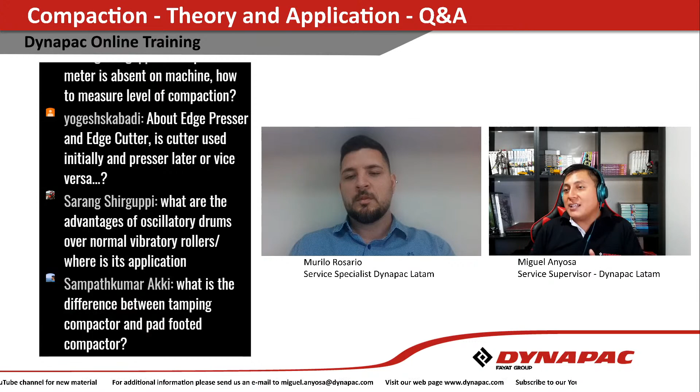Of course, you usually use the CT or the tamping machine for smaller thickness material and smaller grains. So when the material is clay or lime, or silt - very small grains, very very small - you can do it better with a tamping machine. You don't need that much energy, because for example for clay and silt, you will need a big CA6500 PD to reach the same compaction degree that you are reaching with the CT.

That I would say is the main difference. I don't know if you have something to add there, Murilo.

No. And taking that question into consideration, I didn't mention something: when you are talking about a smooth cylinder and you want to convert it to a pad shell cylinder, you use this pad shell kit.

So you add the pad shell, the external kit, and then you have two things to consider. You are adding weight to the cylinder. So when you add weight and you have the eccentrics, which are made to make the cylinder jump a certain amplitude, even with the same eccentric, you won't have the same energy to make it jump the same height.

So it will jump lower, meaning you have less compaction energy. That's something I've seen a lot, where they want to use one machine and say 'I want to use the pad shell kit whenever I want.' You can do it, but you will have less energy, which means many more passes will be needed to reach the compaction degree you want to achieve.

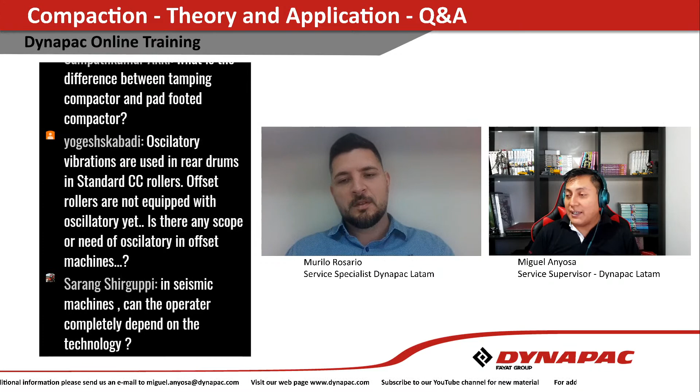I remember we had six machines. Well, I don't know if I mentioned this before, but actually I'm Peruvian. So in Peru we had these six DCO machines. I was not yet at Dynapac, but I was in the Atlas Copco group when Dynapac was part of the Atlas Copco group, and we had this customer complaining about the DCO.

Every time we went, it was an application issue because the customer was moving to manual vibration. The operator was moving to manual vibration to avoid the feeling of lack of energy, feeling like the machine was losing power. We went there—it's not losing power, it's fine. We went back, and then we went back again because the operator was calling, and the problem was they were using high amplitude and started destroying several parts in the machine. So it's quite important, you have to check on this.

Maybe you can take this one, Murilo, because I'm getting quite thirsty.

Can I change amplitude without changing frequency? Yes, we can. Normally it's used in the CA equipment. The frequency is the same, but like one CA 250, the frequency is the same in high and low amplitude. What we change is only the amplitude, it's made by changing the rotation on the rotation side.

In 1973, we changed our name to Dynapac, short for Dynamic Compaction, turning our reputation into a strong and committed brand. Over the years, our pavers, material feeders and other machines also became known for their reliability and performance. Equipped with Dynapac innovations, our machines enable customers around the world to achieve better results. Advanced machine technologies combined with digital solutions increase uptime and ensure the highest quality and efficiency.

Strategically located production units and distribution centers, as well as a global sales and service network, provide the assurance of Dynapac support in more than 150 countries. And yet our story still isn't finished. Under the wings of Fayat, our next chapter begins. We have a new visual identity with colors that express the spirit of Dynapac and our passion for innovation. An identity that signals our independence as a brand, with our own technologies and products and dedicated Dynapac channels focused on helping our customers. Innovation is fundamental to the Fayat strategy.

As part of a group with extensive knowledge on road construction equipment and the ambition to be a technology leader, we can create better solutions for the challenges our customers face. Within the Fayat Group, we can achieve development and sourcing synergies to strengthen our own engineering and production capabilities. This will enable us to extend our offer with new products, services, and digital solutions. Like Dynapac, Fayat knows that great support is the key to customer loyalty.